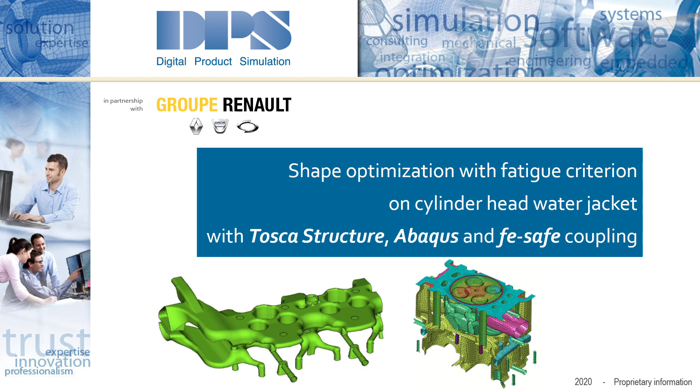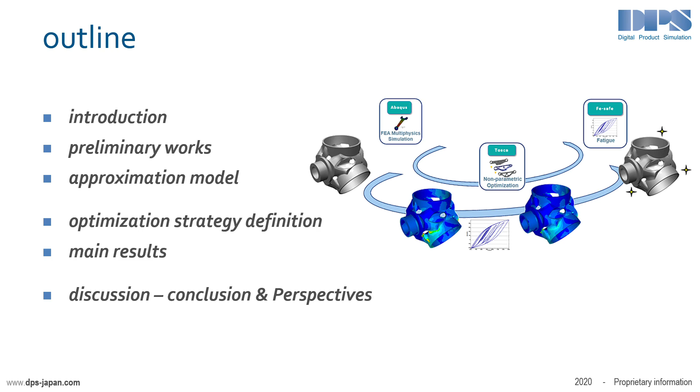After an introduction, I will talk about the preliminary works of the study, and I will devote part of my presentation to the concern of the approximation model. We will then discuss the definition of the optimization process, and I will show you some of the results we have obtained. And I will finish with a conclusion and will open the discussion to your questions.

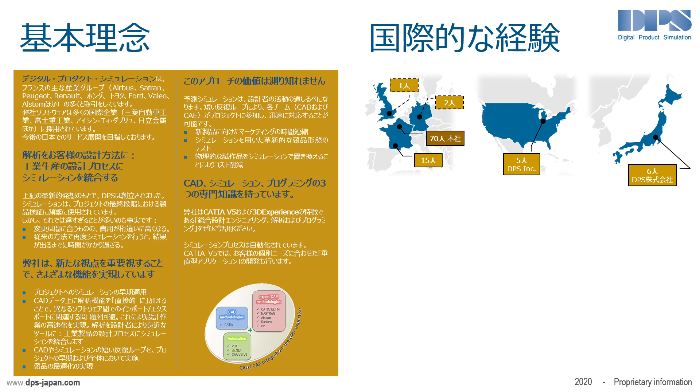I will be brief. DPS is a French company. It was created in 1997. Its subsidiary, DPS Kabushiki Gaisha, is much younger, established in 2017. We have offices in France, in Paris and Toulouse, in the USA, and in Japan. DPS is about 100 engineers. We are technical specialists with expertise in what we call CAD and CAE integration.

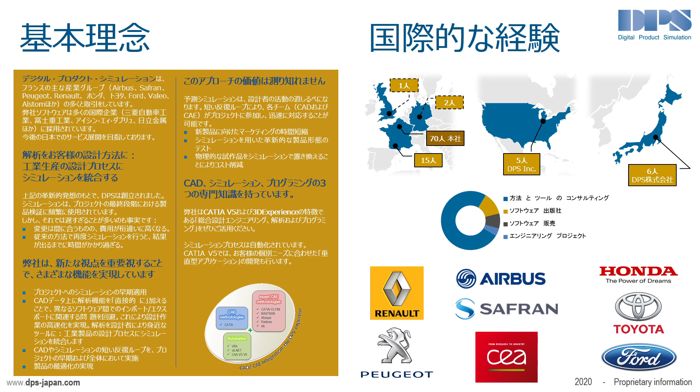DPS works with most major industrial groups from several industries: automotive, aerospace, defense, and energy. By providing services and software to our customers, we help them integrate the simulation of their complex products earlier in the design process. We have a triple expertise in CAD, simulation, and programming. We are in Japan since 2012 with Honda, the major customer of DPS KK, and with Toyota more recently.

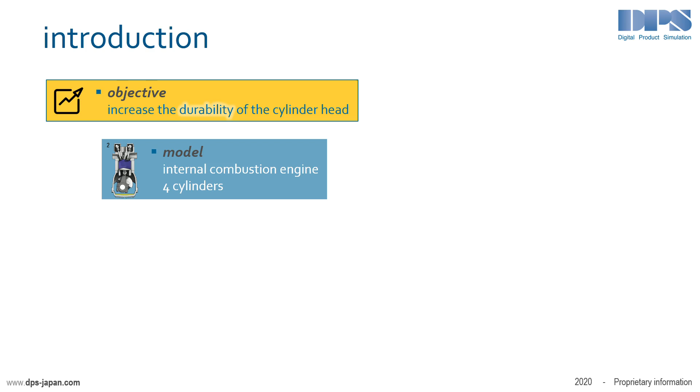Okay, let's move on to more technical considerations. Well, when it comes to increasing the durability of mechanical components, such as engines, the conventional and fairly simple approach is to reduce strain and stress concentrations on parts. Unfortunately, in complex cases, because of the cyclic nature of the loads, the location of stress peaks is often different from the area of maximum fatigue damage.

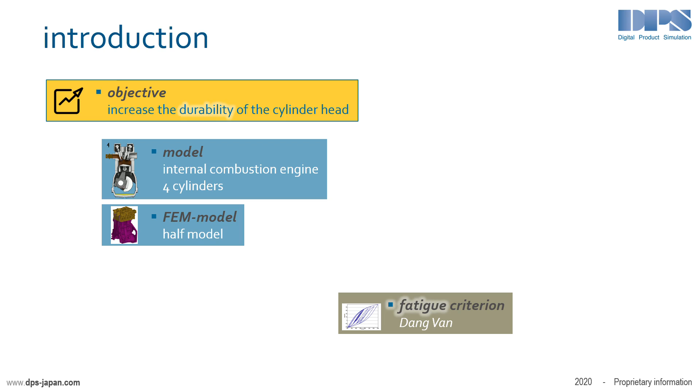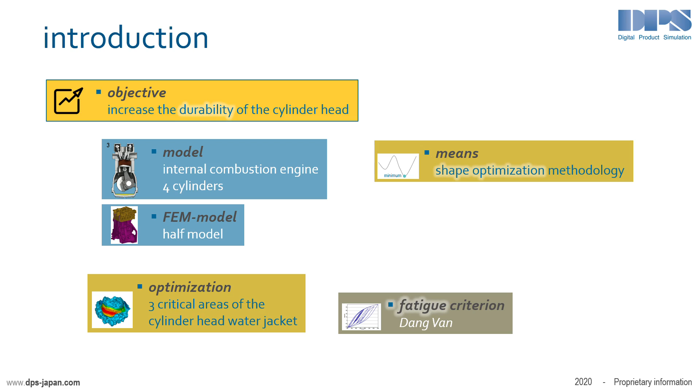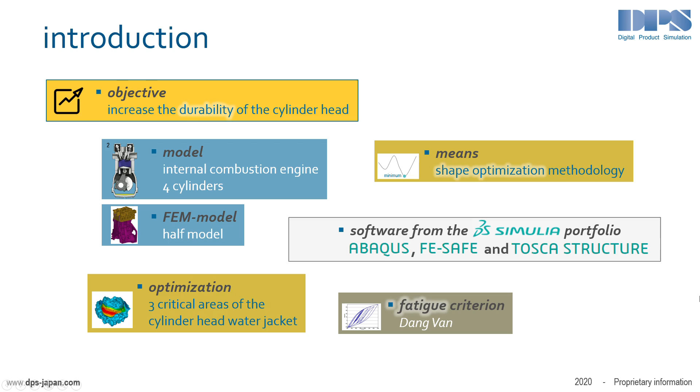The combination of structural analysis and fatigue software is a first step towards improving the durability of a system. And at this point, we can also consider adding shape optimization tasks to the process to identify the minor changes in geometry that will have the greatest impact on the lifetime of the system. That is what we did. And we have defined for Groupe Renault an innovative methodology based on the SIMULIA portfolio, Abaqus, fe-safe, and Tosca Structure.

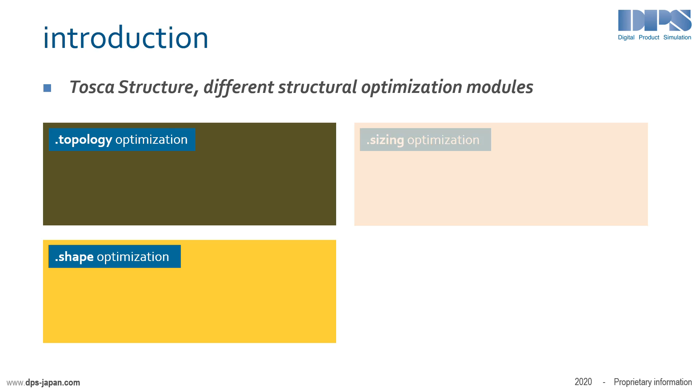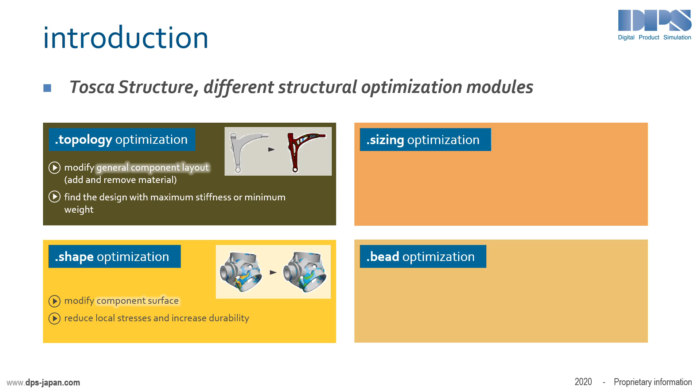Tosca Structure is a non-parametric structural optimization software. It provides four main optimization modules. The idea of the topology optimization module is to change the general layout of the component. We define a specific objective for the maximum stiffness structure or to minimize the weight, etc. The solver will remove material until the objectives that have been defined are reached. With shape optimization, we modify the surface of the component. This is the technique we use for this study.

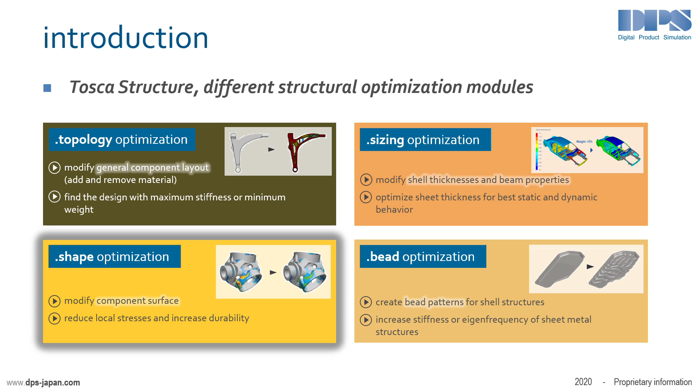Sizing and bead optimization apply to shell and beam structures. With sizing optimization, Tosca looks for the best arrangement in terms of element thickness or beam property with regard to static or dynamic behavioral objectives. The bead optimization module suggests the creation of optimized bead patterns. This will increase the bending stiffness of the part and, in some cases, the eigenfrequencies of the sheet metal structure.

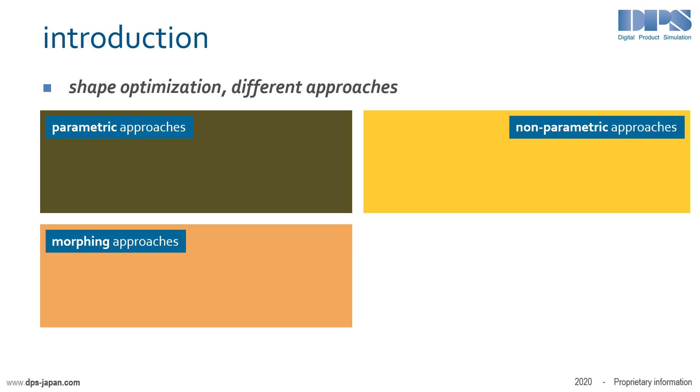If it is no longer possible to make large changes to the geometry, you will probably want to perform shape optimization. The typical reason is to homogenize the level of stress and eliminate the local hotspots. The parametric and morphing approaches are very similar. Depending on the number of parameters involved, you can implement a design exploration method to find the best configuration for these parameters. This can be done with Isight or 3DEXPERIENCE Process Composer.

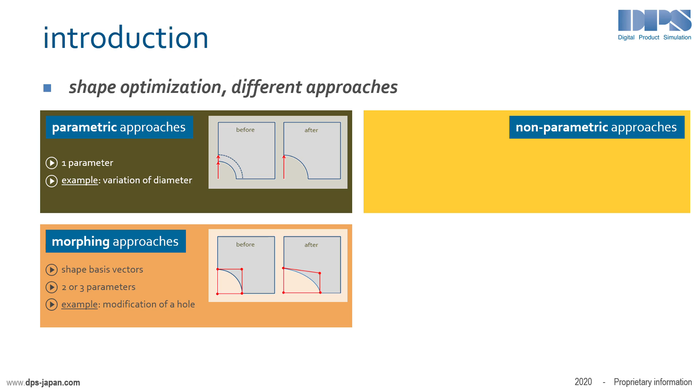But the most generic approach, one that offers the best benefit potential, is definitely a non-parametric approach. You do not need any parametric model. The setup is very simple. It considers the nodes of the surface and adjusts their positions as a freeform. We use this method with Tosca Structure in our study with Groupe Renault to determine the optimal surface contour of the water jacket.

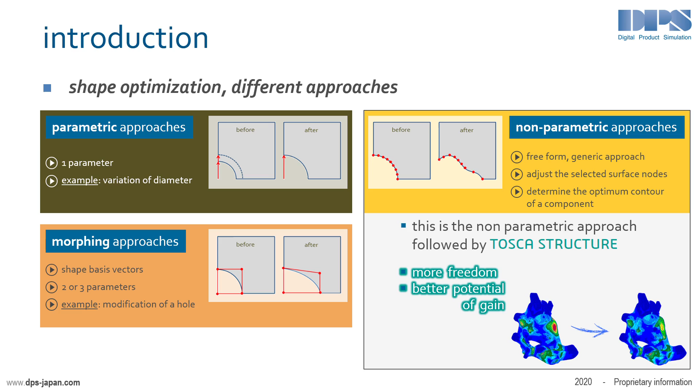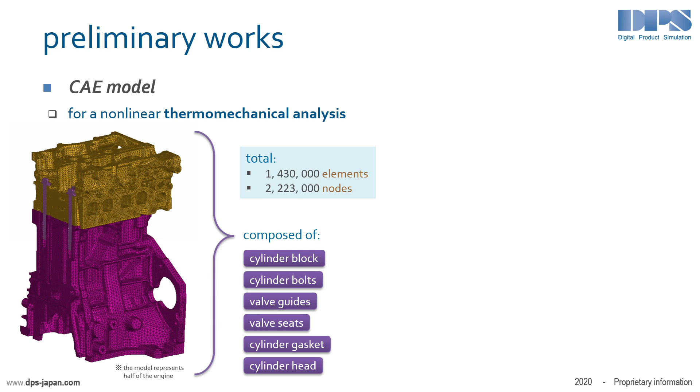I will not go into the details of this slide. Our CAE model is an assembly of several parts. This represents about 1.4 million elements, 2.2 million nodes. The cylinder head part has a finer mesh. It alone accounts for 80% of the number of nodes and elements. Inside the cylinder head, the water jacket surface of rather complex shape presents the finest mesh.

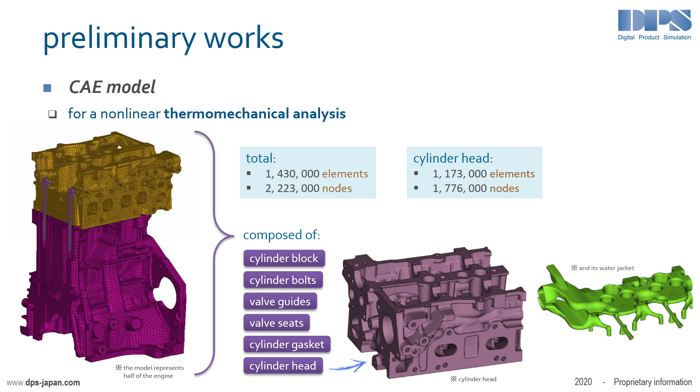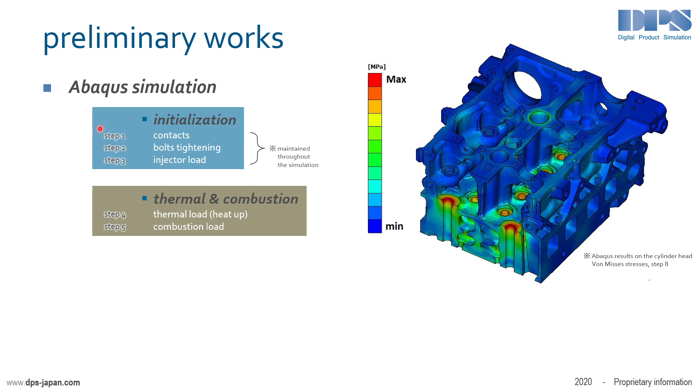The Abaqus simulation that we have set up is very common for this type of problems. 8 steps have been defined: initialization steps, steps of heat transfer and combustion, with thermal loads and combustion resulting from 3D CFD simulations.

In this study, 2 thermal cycles are applied. Each thermal cycle comprises 2 steps. Between them, the cylinder head is cooled to the minimum operating temperature. Thus, the nodal temperatures of the last 2 steps representing a thermal cycle are assumed to be a steady-state solution. Of course, because of the definition of contact and the material, the problem is nonlinear.

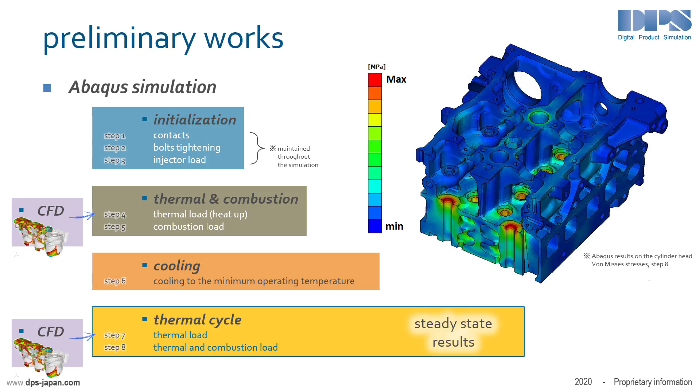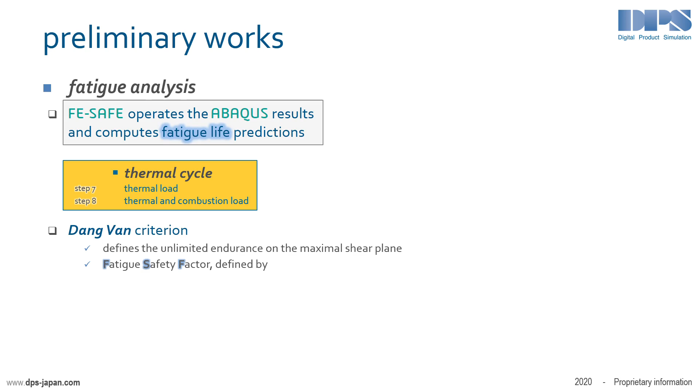For this study, the prediction of fatigue life is calculated by FE-safe using the Abaqus stress field resulting from the thermal cycle. Regarding fatigue, the Dang Van criterion is a very common standard. Only a few physical tests are necessary to determine, for a material, the characteristics of the Dang Van domain.

Hydrostatic pressure and the level of shear stress during a cycle are major factors in the fatigue strength of a part. If we trace the load path followed by an individual grain of material during the cycle, we can determine a fatigue safety factor, defined by the ratio between OA to OP. If FSF is greater than 1, the criterion predicts that no cracks will be initiated near this grain. On the contrary, if the criterion is lower, a crack will occur, causing the area to fail.

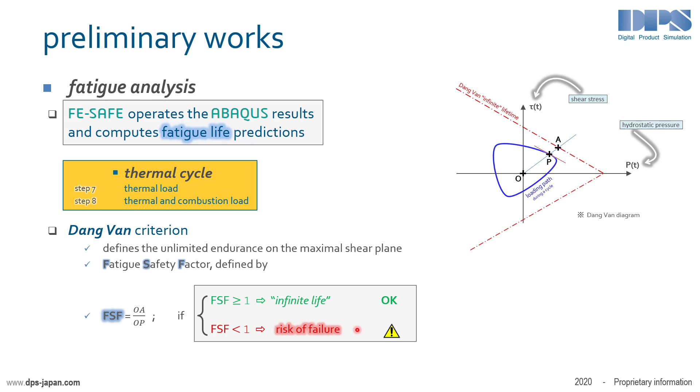The practice at Groupe Renault is to add a safety margin when using the Dang Van criterion. With this modified criterion, the fatigue safety factor was evaluated over the entire surface of the water jacket. In doing so, 3 critical areas have been identified.

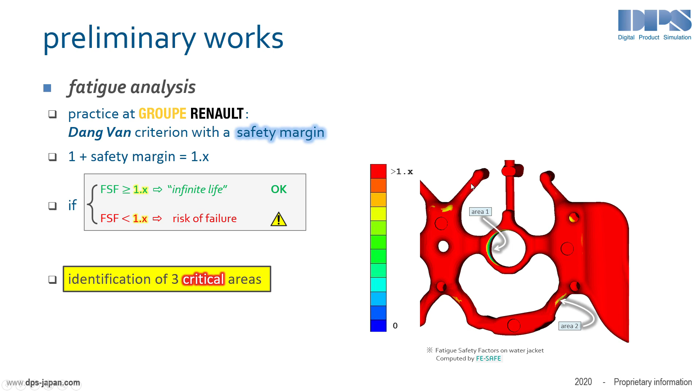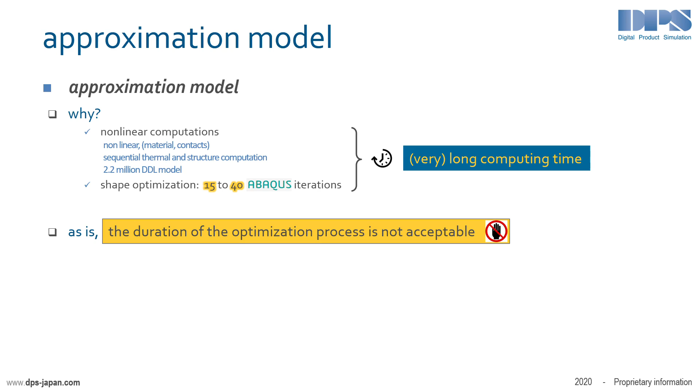Well, given the size of the model, the type of computation, since the shape optimization consists of 15 to 40 iterations, it is clear that the computing time could be very long. As such, for industrial applications, the duration is not acceptable. So what to do? Well, we need to reduce the Abaqus computation time and the number of iterations of Tosca.

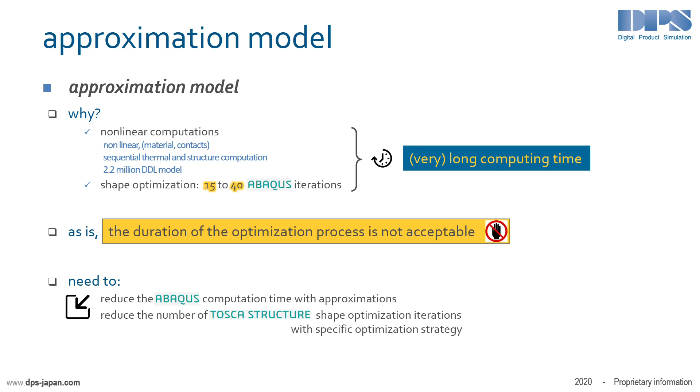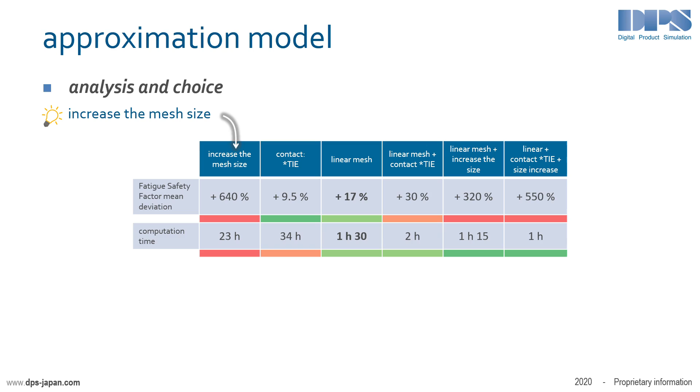In order to reduce the Abaqus computation time, several possibilities have been imagined and tested: increase of the mesh size, change the contact pair by specifying tie conditions, etc. You can see a comparison between the reference case and some approximations in terms of computation time and accuracy.

The best compromise is the linearization of the CAE model, which consists in changing the quadratic elements into linear elements. In this way, the computation time becomes acceptable, 1 hour and a half. It was about 50 hours with the reference case, while the fatigue safety factor deviation is only 17%. I will discuss later how we took this deviation into account.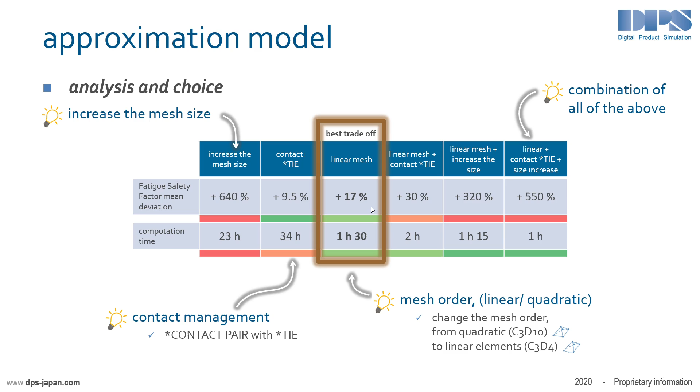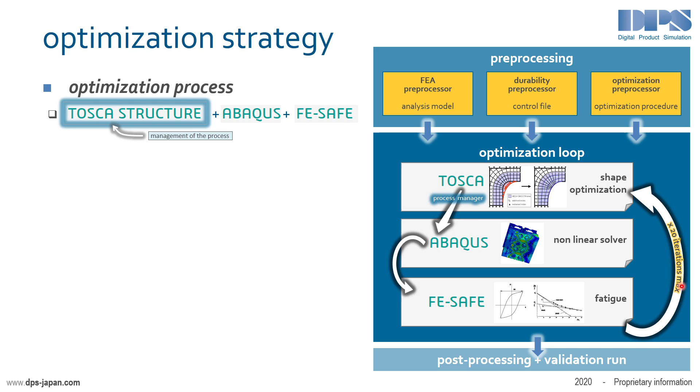So we implemented an optimization process with Abaqus and FE-safe, controlled by Tosca Structure. Thermal and structural simulations are performed by Abaqus, which transfers the result of the stress field to FE-safe. Then, FE-safe calculates all variables related to fatigue life prediction, such as the local values of the fatigue safety factor. The shape optimization is entrusted to Tosca Structure.

Tosca offers several algorithms to drive optimization. The best choice in our case is the algorithm called controller-based algorithm. One of its advantages lies in its very fast convergence capability. Using this algorithm, a maximum of 15 to 20 iterations only are needed to obtain the optimal solution. It is very interesting in our case. This will help us limit the computation time.

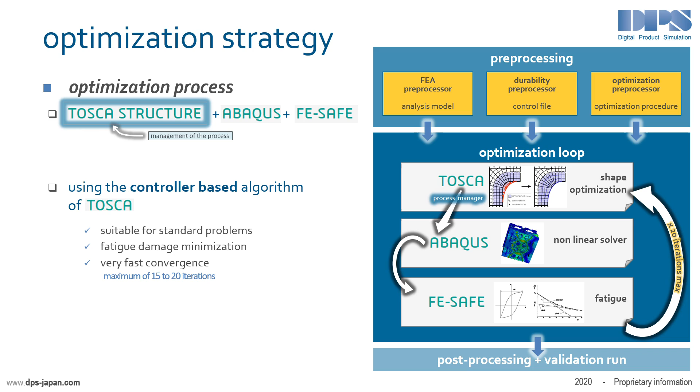Regarding the setup of the shape optimization case, two main things must be defined. The first is what we call the design space. This is the region where optimization is free to modify the shape of the component. We have defined a very local area. It is composed of nodes for which the fatigue safety factor is less than 1.x.

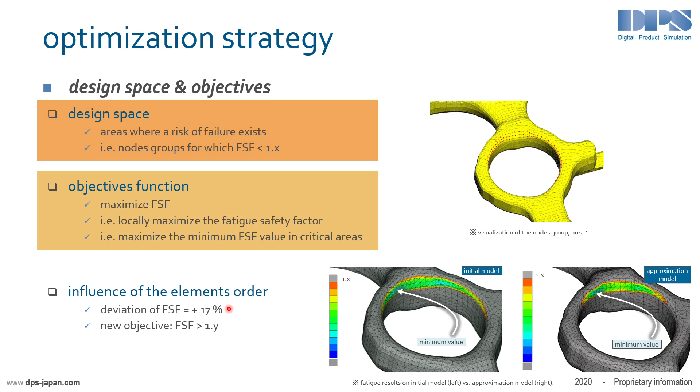The second point is the definition of the objective function. In our case, we define a maximization function. We want the process to maximize the fatigue safety factor. We especially want to increase the minimum value of this factor. Our approximation model returns an overestimate of the fatigue safety factor. This is shown on these two images. For this reason, we increase the objective value by 17%.

We also define a non-design space, meaning the precise regions where the modification of the shape of the component is strictly forbidden. This corresponds to holes, machined valve seats, etc. We have also defined the constraints of the shape optimization. These constraints are mainly limitations for maximum and minimum displacements. They come from the analysis of the preliminary Abaqus results and Groupe Renault's business expertise.

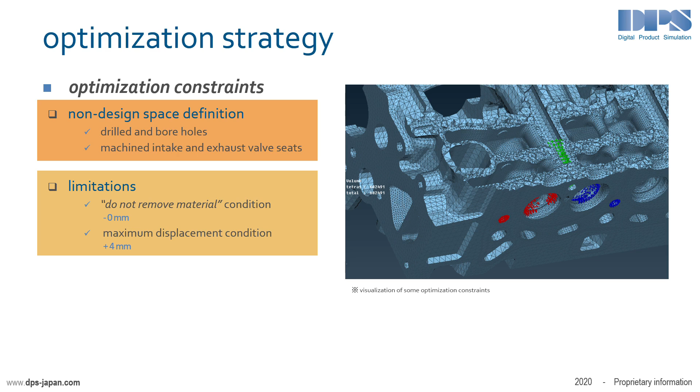If we allow some nodes to move, we need in some cases to generate a smooth surface. Mesh smoothing is performed internally by Tosca Structure during the shape optimization. It is done not only on the elements belonging to the surface, but also on the elements located inside the part. Because it avoids the distortion of the mesh and controls the aspect ratio of the elements, the smoothing preserves a high mesh quality at each iteration of the process. This ensures that the finite element analysis quality will not be affected by the stretching or contraction of the elements in the optimized areas.

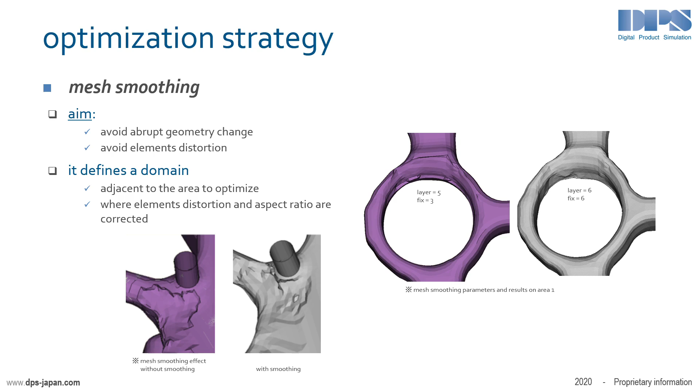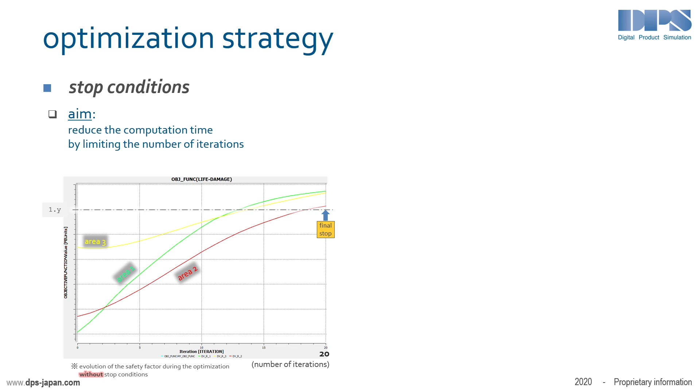After defining a design space, constraints, and optimization objectives, we can start the optimization process. Here is the evolution of the fatigue safety factors of the three areas. It shows you the improvement we can achieve after a loop of 20 iterations. But speaking of optimization strategy, we have also implemented a technique to reduce the number of iterations. It is based on splitting the optimization into three distinct tasks, one task for each area, and the definition of local stop criteria. Here is the result.

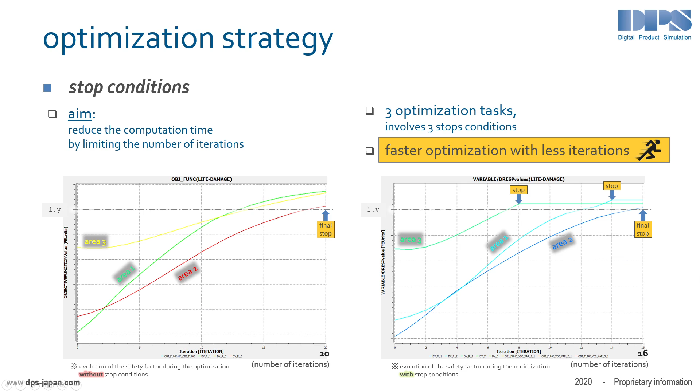First, the total number of iterations has been reduced from 20 to 16. But more than that, when a stop is triggered, which means that the local objective is reached, the rest of the computation progresses faster because the process focuses only on the remaining areas.

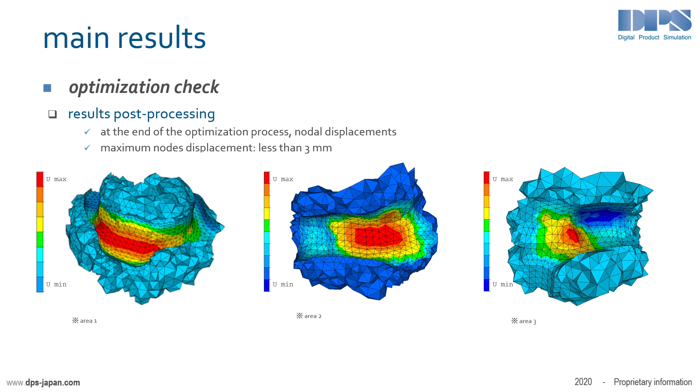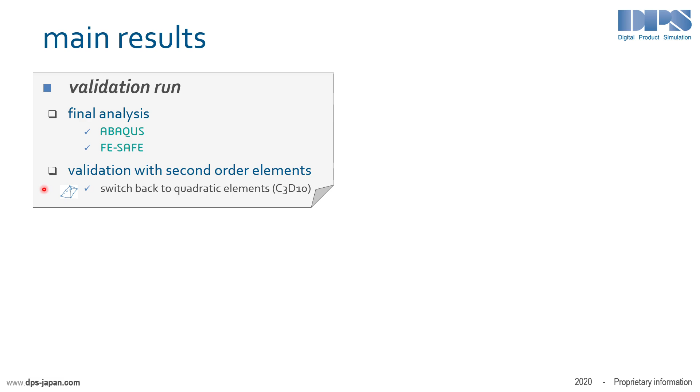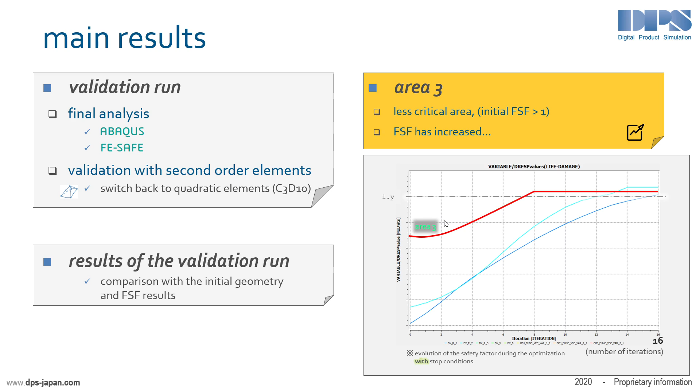After this, we performed a validation run. For this, we switched the Abaqus model back to quadratic elements. We got this final result for area 3, which was the least critical area. For this area, the initial fatigue safety factor was very close to the objective. Durability has been improved very quickly. One remark: for some spots, the FSF calculated with quadratic elements is slightly less than 1 plus x. Two explanations. First, the smoothing in this area is maybe not perfect, and second, in areas where the FSF value is already high, the deviation from the approximation model is certainly greater than 17%. This means that we should have set area 3 a higher objective.

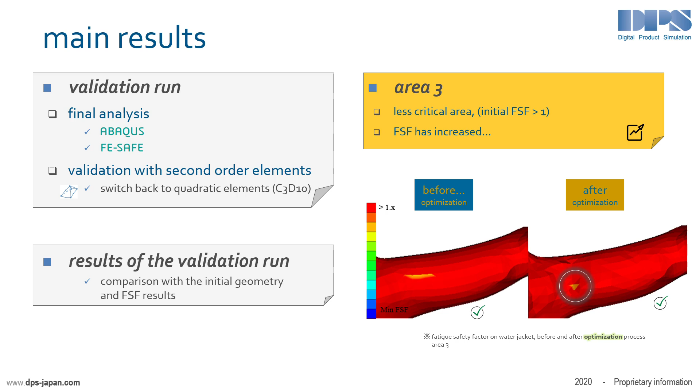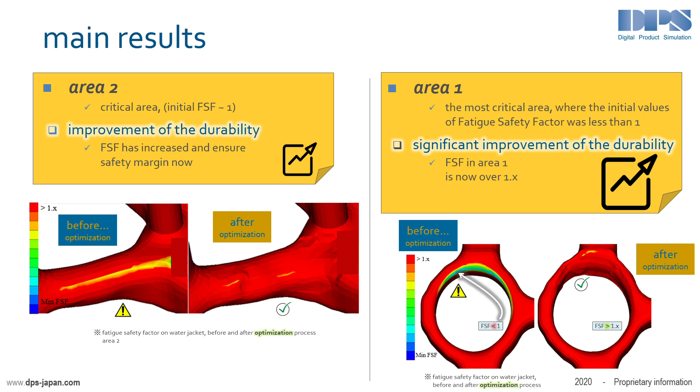Area 2 was a little more critical. The initial value of the FSF in this area was close to 1. The optimization process increased the safety margin, and almost every element of this area has reached our objectives. For area 1, the improvement is very impressive. It was the most critical area, and the minimum value of the FSF was less than 1, expressing a real risk of failure. After the optimization process, the durability is really improved. All elements of area 1 now have an FSF greater than 1 plus x. This is clearly the most important result of this study, and this represents for us and Groupe Renault a great success.

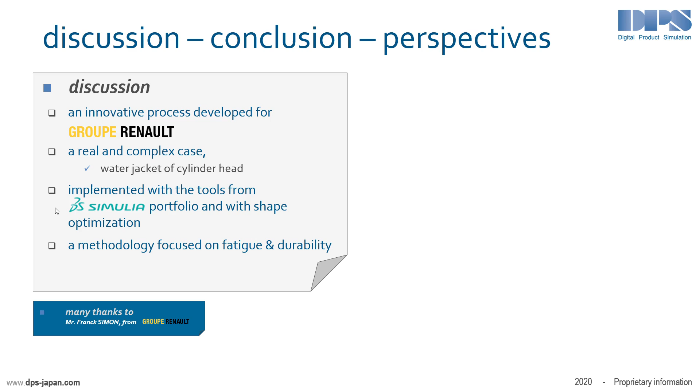Well, the time has come to wrap up. DPS has successfully developed for Groupe Renault what I believe to be an innovative process, not only in terms of shape optimization, but more generally with regard to improving durability of components. The use case presented today is a real industrial case. DPS has implemented this methodology by leveraging the SIMULIA portfolio, which offers a complete solution for realistic simulations. This is very positive for our customers. This helps them reduce the risk of fatigue failure of their cylinder head. This methodology shows an impressive improvement in fatigue safety factors in areas where risk existed prior to optimization, while the computation time has become totally acceptable.

With regard to the perspectives we are working on, first, we would like to improve the definition of mesh smoothing. We believe that better mesh smoothing can improve results and reduce the time needed to redefine the shape locally. Second, we would like to further reduce the computation time, and for that we are currently studying the possibility of using submodeling techniques. And last, we are thinking of other components that can benefit from this technique.